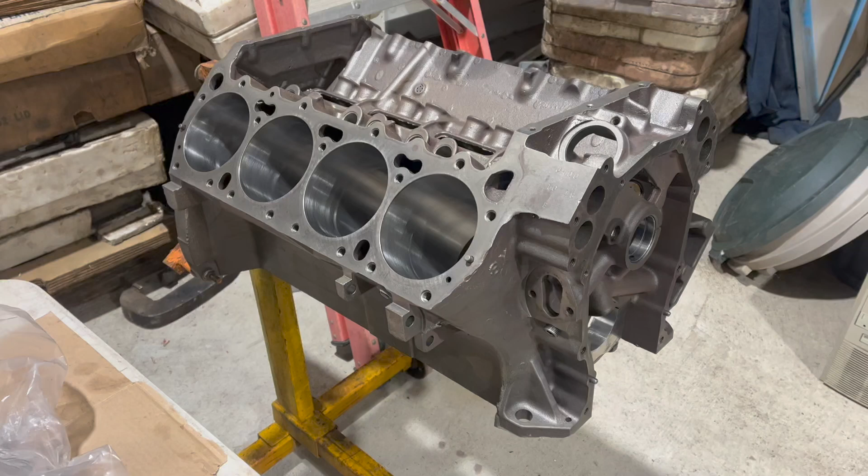Today on the Dodge Garage, second verse, same as the first, except it's not at all the same, actually. More on that in a minute. This is not a full rebuild guide video. If you want one of those, go see the video I did on this 440 a few weeks ago.

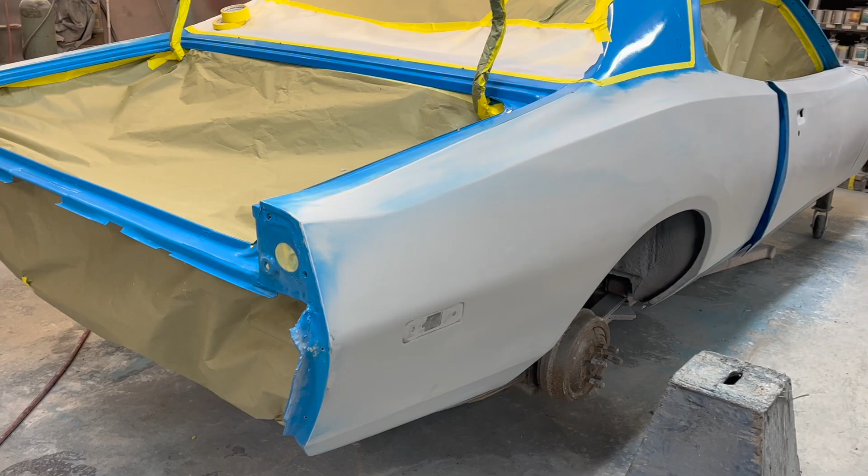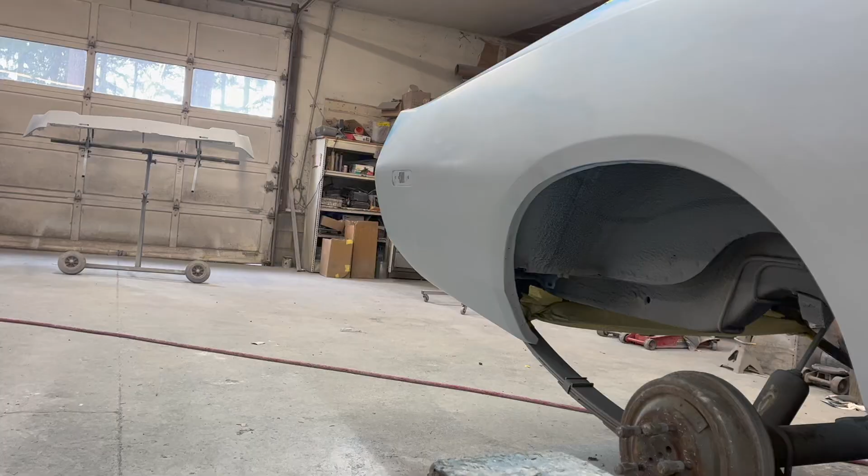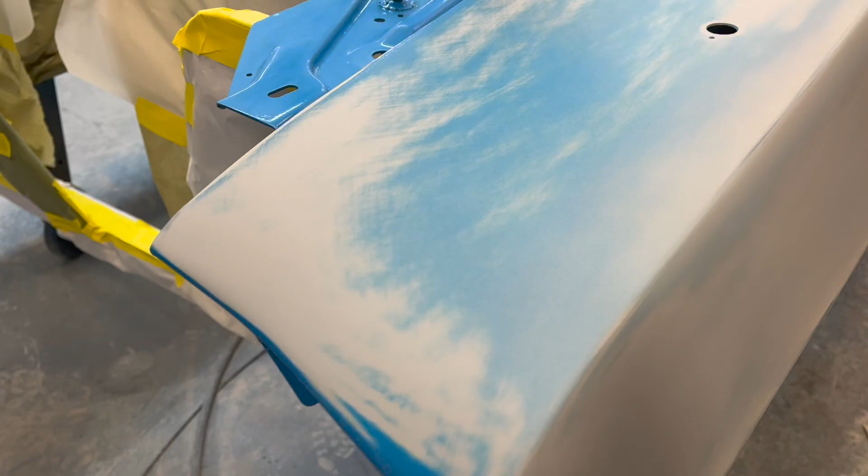This is the factory 400 block from our 73 Charger project. The car's not here right now to show you, but well, we could just pretend it's this one. I did recently go over to the body shop to check on the progress on that car, so let's cut to that real fast. Sure looks good, doesn't it?

The factory 400 block was cleaned and machined by our favorite local machine shop, Johnson Machine. They did go ahead and install the cam bearings for me too, which is great. Although it was a low compression cast crank engine from the factory, the 400 is actually a very popular platform for doing performance builds because it has the biggest bore of any Chrysler big block. It also has the lower deck height though, which means it weighs a little bit less than a 440 and it fits in things better.

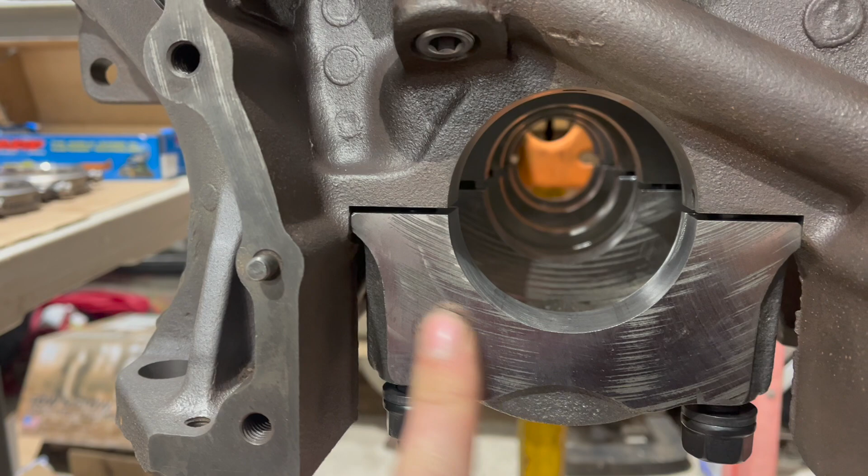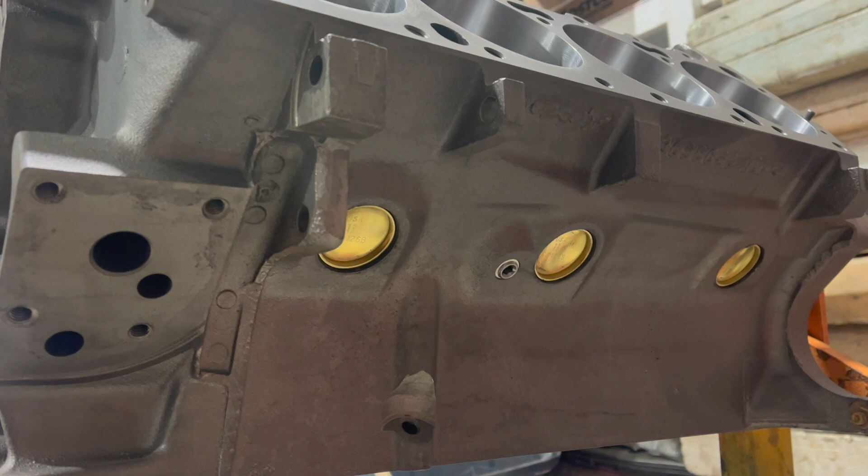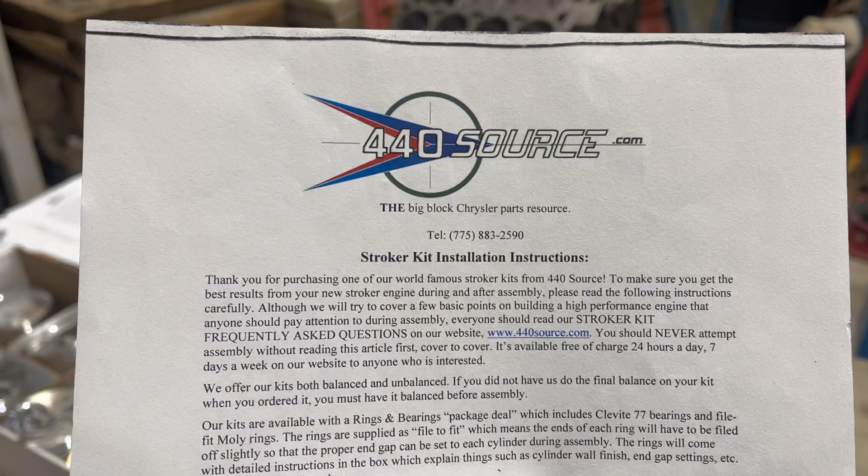Cool stuff. Back in the bad old days, the way to make yourself a really awesome short deck motor was cut down the mains on a 440 crank and shove it in there, along with a piston to make all that work. The end result is a really neat engine. That's basically what we're doing here, but better in every single way. The stroker kit I'm going to be installing in this engine comes from 440 Source, along with the cylinder heads and just about everything else. They've gone to great lengths to make this kit easy to install and easy to understand.

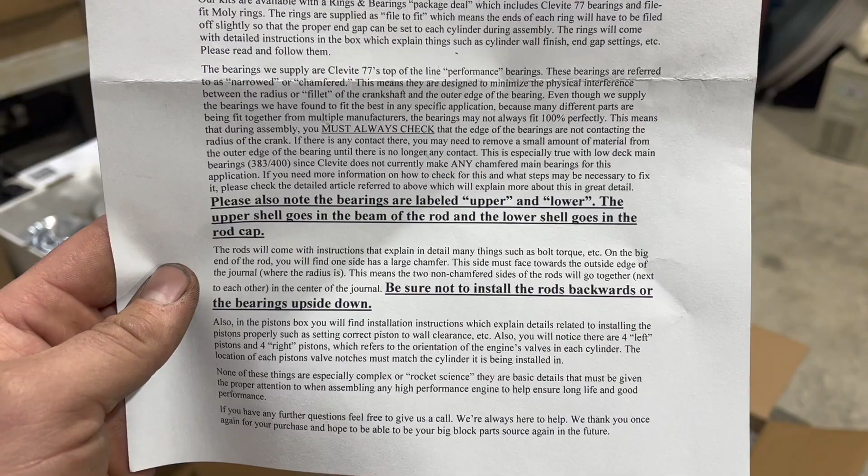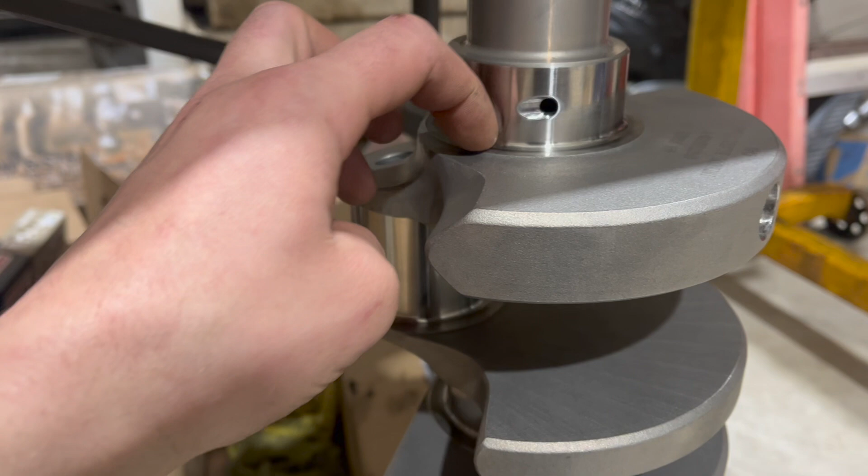This is the crank included with the 440 Source stroker kit. It's a very nice piece. Note, the machining looks excellent. Also note this chamfer here. More on that in a minute. These assemblies come pre-balanced. Johnson did go ahead and verify they did a good job, which they did. We're going to install it as it came.

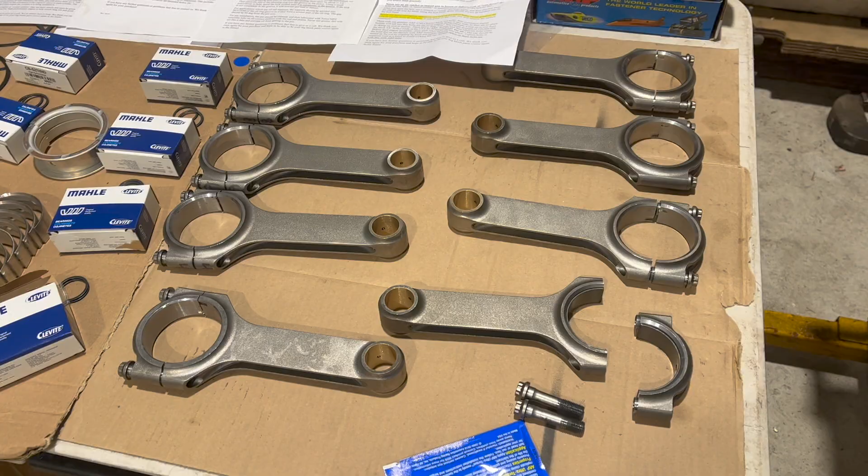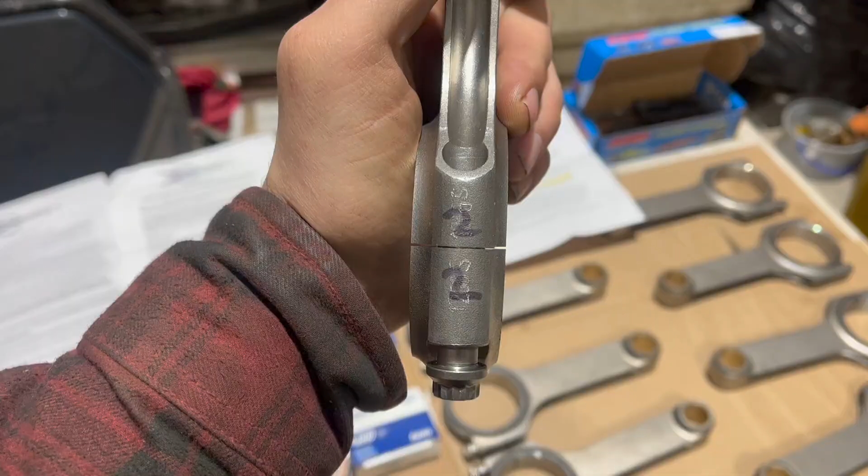Here are the rods included with the kit. They're H-beams. They look very, very nice. They're bushed for floater pistons, and they include ARP fasteners. Again, really good stuff. As I'm laying stuff out here, I have hand numbered the caps and rods just to make sure I don't get them mixed up. In the instructions, it says specifically you are not allowed to use a hammer type punch number marker or anything like that. You're not allowed to grind on them either because of structural rigidity.

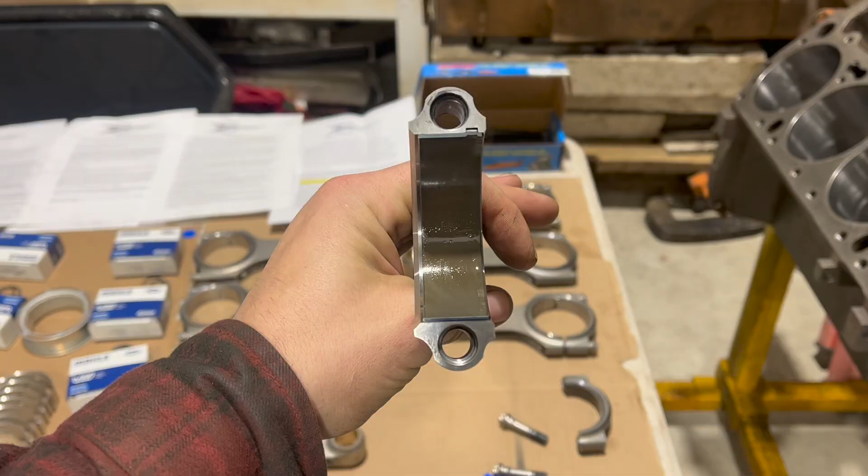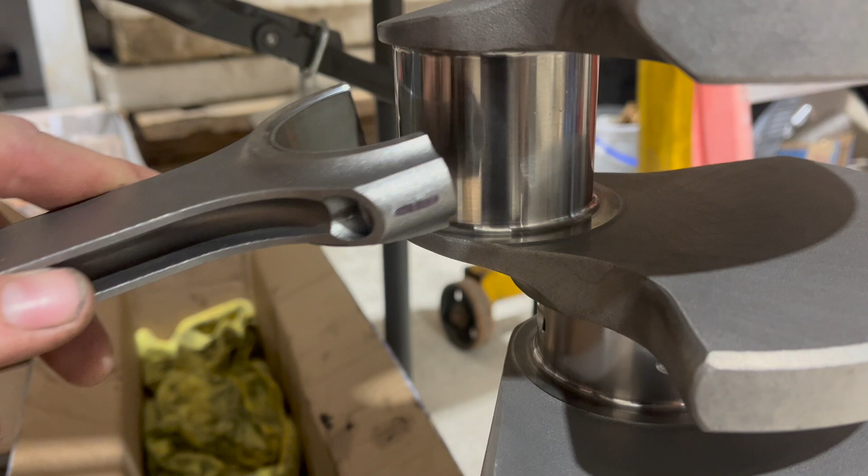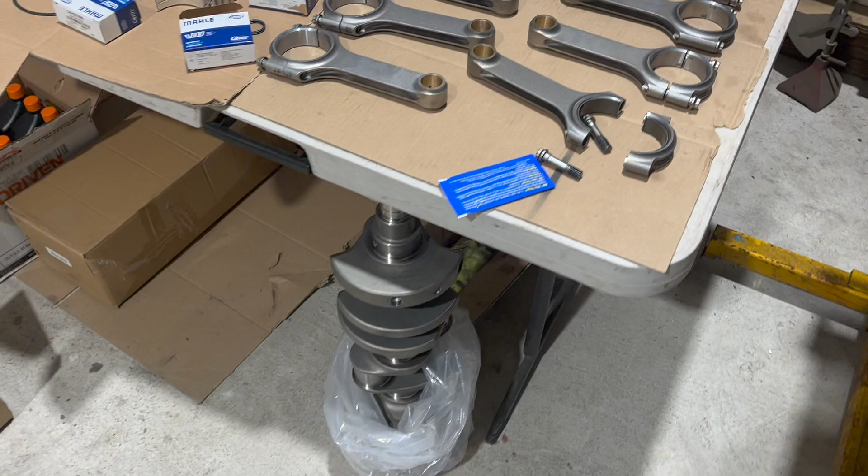These rods are provided with a special high performance set of rod bearings, and here's why. Notice it doesn't fully fill the journal area there? That's because this bearing is specifically made to match cranks that have a chamfer here. A factory type bearing is wider and it would interfere with that. You don't want that. With this one, it sits nicely, just like so. It's great that 440 Source makes this a no-brainer by including the correct rod bearings. If you're putting a combination like this together, or maybe you're rebuilding one of these 10 years from now, you're gonna wanna make sure you get the correct bearings or you're gonna have a bad time.

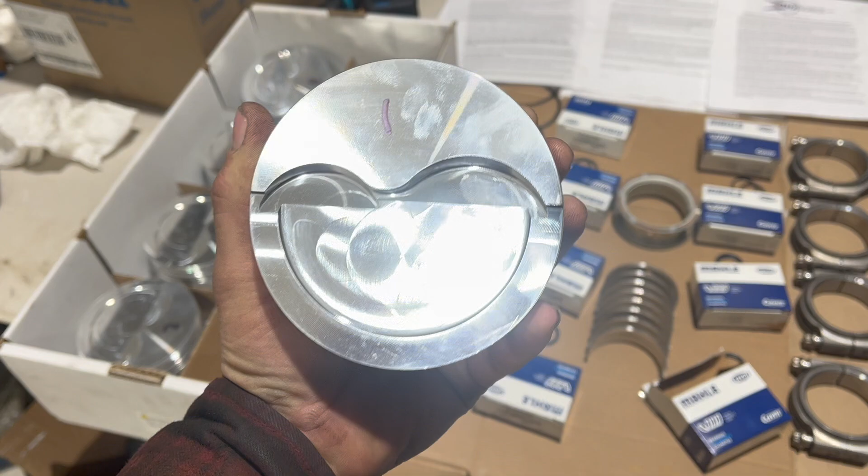And now for the pistons. Look at this. It's so small. It's so light. The pin is raised all the way up into the oil ring area, so yeah, that's interesting. Obviously, this forged piston is made by Icon. You can see here the asymmetrical valve reliefs. It is, of course, a floater piston, so it's going to use these spiral locks to retain the piston pin thingy.

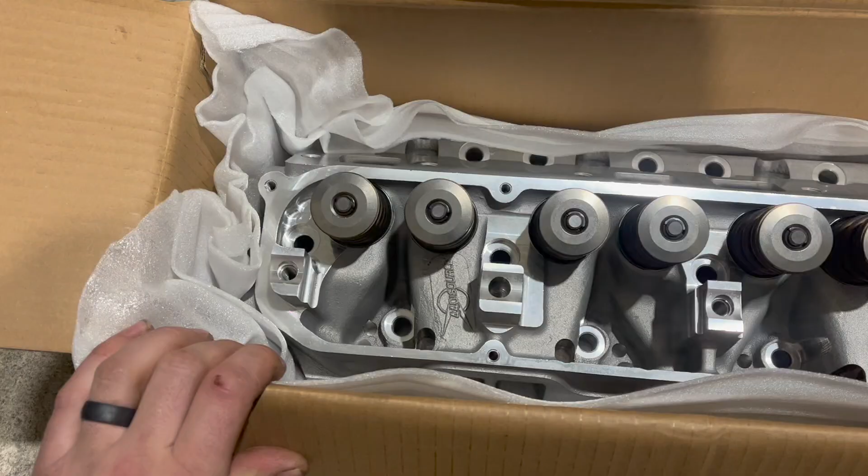Because the valve reliefs are asymmetrical, you have to arrange them in left and right. This sets those reliefs up to match the pattern of valves on the head, which is exhaust intake, intake exhaust, exhaust intake, intake exhaust. You don't have to just remember that either. You can just look at the head.

Exhaust, exhaust, two intakes in the middle. So make it match that. You can see here why it needs larger relief for the intake valves. They're humongous. And since we're already here, we better just take a look at these 440 Source Stealth heads.

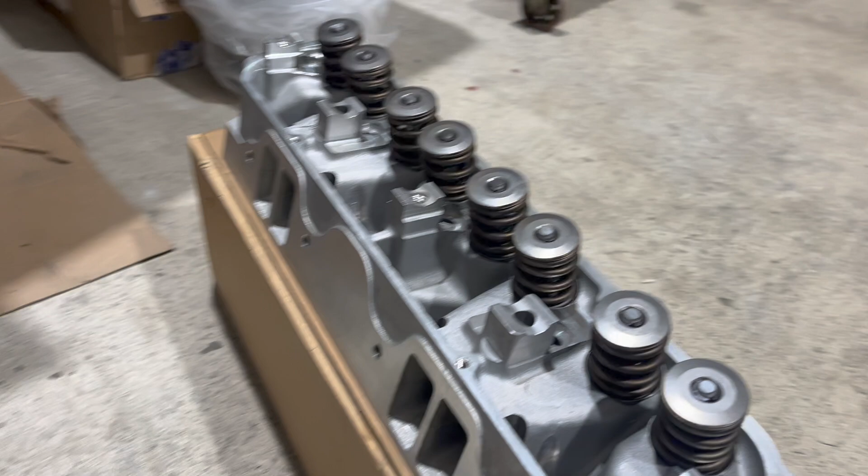If you don't know about these things, they're amazing. They're made of aluminum, and they're a performance unit, but they're made specifically to look just like a factory iron head. So once you throw some paint on these, no one's ever gonna know that they're there. Okay, they'll know if they look at some of the finer details here, but that's not the point.

They have coil inserts in all the bolt holes for strength. That's awesome. Standard rocker shaft oiling. Looks great. They come fully assembled with valves, valve springs, keepers, all that stuff. I don't actually know the specs on these springs, but for what we're doing, I'm just gonna assume they're fine.

And now for the truly amazing part. We paid $600 each for these heads. Seriously, how are they that cheap? We did have our machinist check these as well, and they're good to go. You definitely want to do that with any set of assembled heads you're ordering. I've heard Edelbrocks are particularly bad, but yeah, these things look really good.

I don't think you can usually get an old set of iron heads reconditioned for $1,200 with all new valves, springs, hardware, machining, the lot. These are really neat, really smart money. And did I mention, they're like impossibly light. I don't even, yeah. Super neat.

That's so cool. I set this on here to check the dowels. I think I mentioned this in a previous video. I've had issues with heads hanging up on those dowels before, and well, leaky head gaskets are definitely something we don't want on this deal. Looks like it's all good.

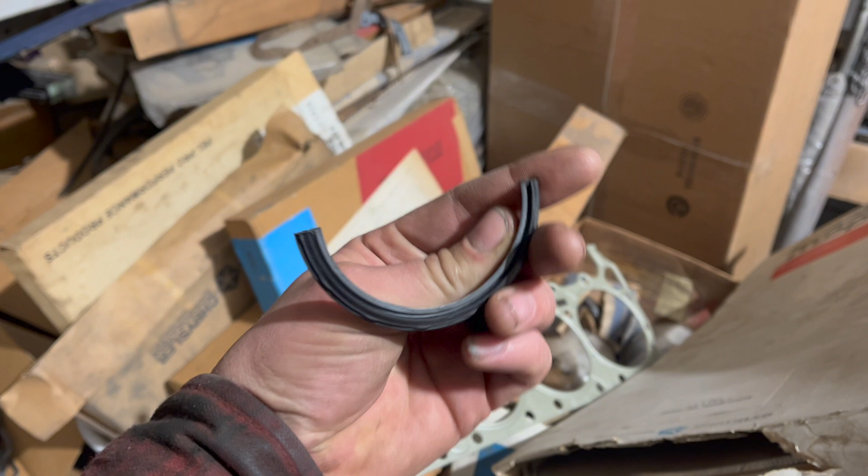Well, I have the main mechanical pieces. I'm missing some small stuff. Camshaft, rockers, lifters, pushrods. More on that stuff in a minute. One important thing, gasket set. I really need a rear main seal right now to install the crank, and I did find one back here. I also found something neat. Factory Mopar branded replacement steel shim gaskets.

On the subject of things that are missing, I guess now's a good time to talk about the cam. I imagine this is the thing people are going to ask about the most, so let's cover that. We're doing a roller conversion on this engine. Honestly, we're doing it for longevity, and so we don't have problems, but also because, well, it's in the budget, and it's way better than flat tappet.

Let's talk about what this engine and car are going to be, and what they're not going to be. What they are is a very great daily driver with torque, fuel injection. The car is probably going to be running with stock exhaust manifolds, but the owner wanted some more poop than you could get with a factory 400. But he wanted to do that within the confines of the factory block. So that's kind of what we're going for here.

This thing is going to fry tires all day long. It's going to do neat stuff. It's not going to make 500 horsepower. There are much, much more radical camshafts available. And the heads that we're using definitely would have allowed for something like that. But that's not the goal here. We're going to keep it reasonable.

With all that in mind, we chose the Lunati Roller Conversion Retrofit Hydraulic Roller Cam, designed for a Chrysler big block, and it's a split duration 262/270. The duration at 50 thousandths is a much more reasonable 211/219. Our lift is 507 intake, 515 exhaust. Again, not a ton. Something in the neighborhood of the legendary 509 Mopar cam.

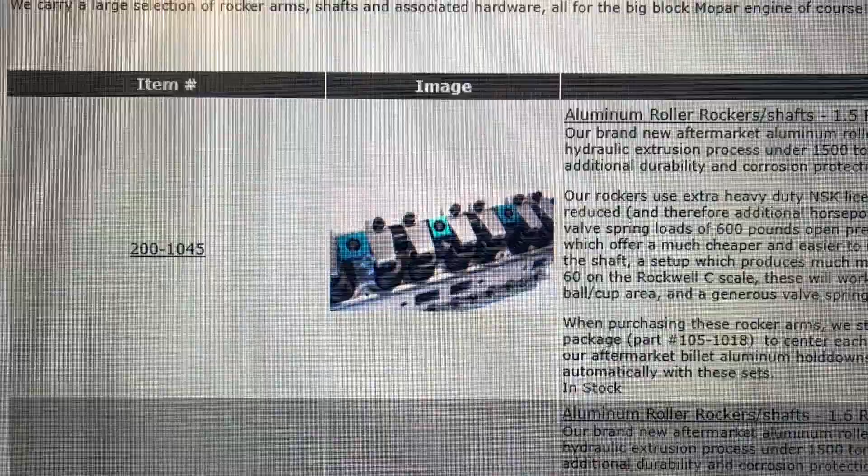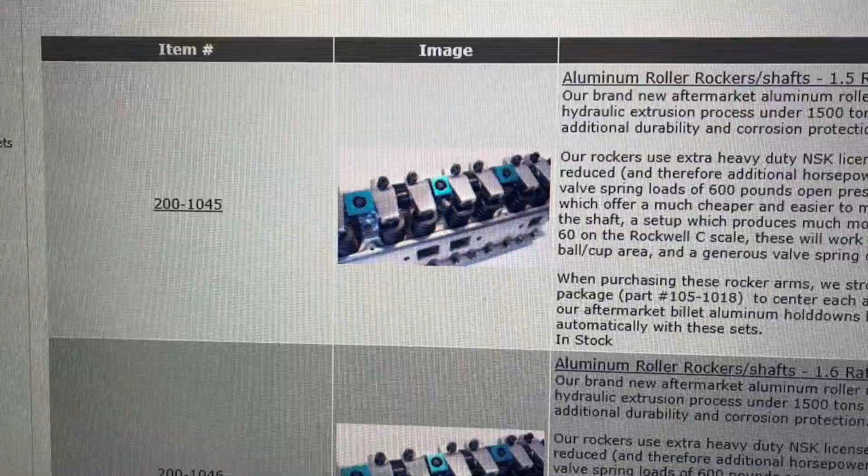We're not installing these to get the most horsepower possible. We're not installing these to spin this thing to 7,000 RPM. We actually are installing these to get the adjustability, so we can lash the hydraulic rollers correctly to try and prevent valve float and get really nice RPM ability within the confines of our modest street cam, that is. We're also using an Edelbrock Performer RPM dual plane aluminum intake manifold. It's not here yet either.

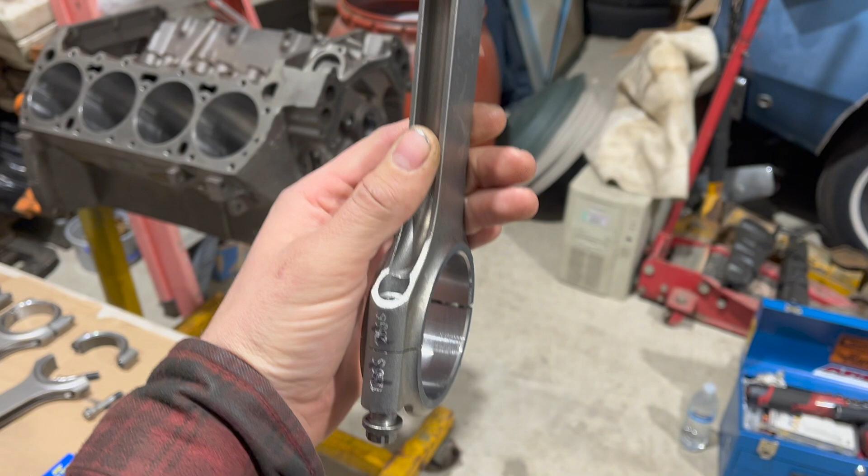Now again, I'm not going to show you all the little minutiae of putting this engine together. I do want to cover some of the specific things to this build, like assembling the pistons in the right orientation. I've mentioned this before, but the notches there for the bearing shells should point to the oil rail. So I've numbered each rod so you'll see the number when it's in its correct orientation. I did number the pistons. Of course, you'll know they're incorrect when you can read that number. Don't put the valve reliefs that way. Don't ask me how I've learned that either.

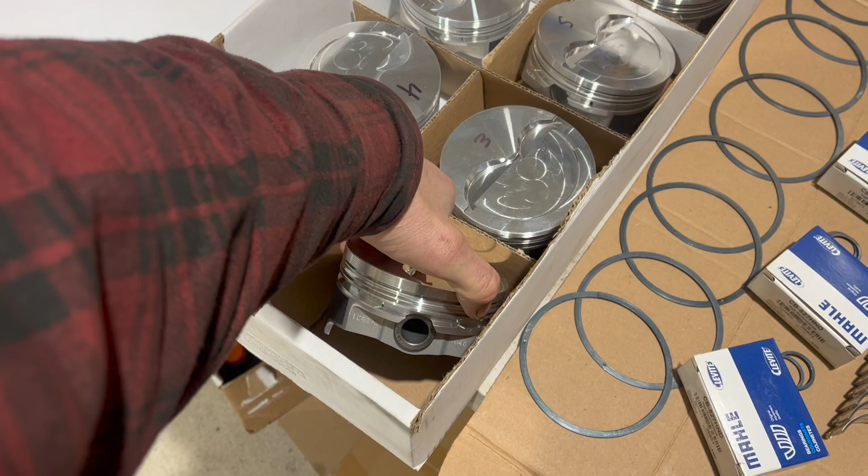One peculiarity of this piston design with the pin raised up into where the oil control ring is at, they supply this extra support ring which goes underneath your oil control ring pack. I've never installed those before either, so it'll be interesting to see what that looks like.

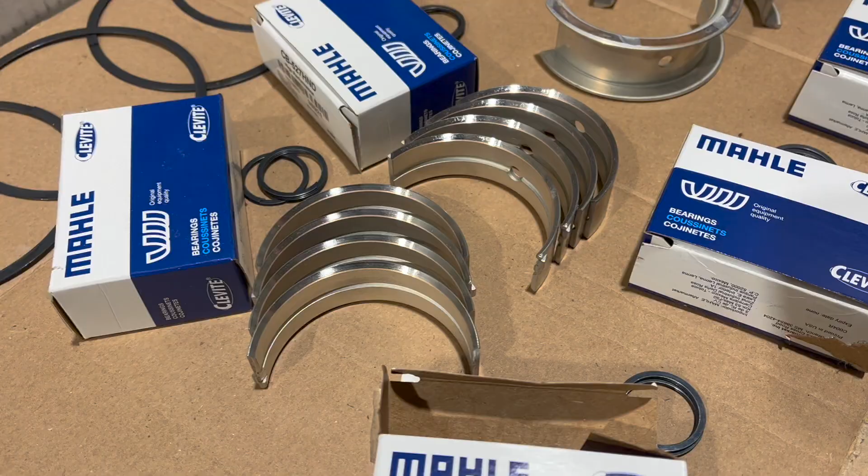Someone asked me on the previous build what I thought of full groove bearings. Well, I think they're the right thing to use for a performance assembly like this, and that's what they've supplied here. One interesting note here, the lower rod bearing shells have oil holes in them. They don't go anywhere, and no, I didn't put them backwards. I thought they might have a passage going up to the pins, but they do not.

Well, you have to start somewhere, and I've decided to start with piston assembly. Let's put these on the rods. Look at that. This is where your pin oil comes from. Scraped off by the oil ring and shoved in there. That's pretty neat. Anyway, the first step here is to install the spiral lock on one side 8 times. I don't like spiral locks. I prefer the snap rings.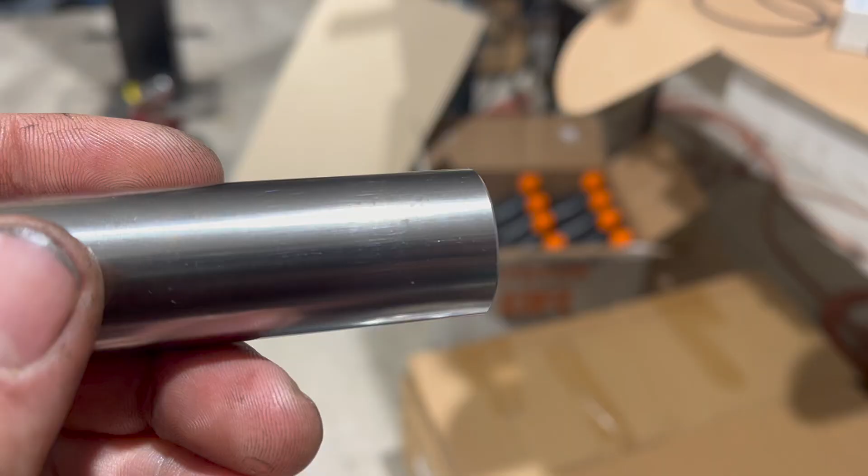Number 1 piston assembly. Did have to rewrite my number because, well, I wiped it off while I was trying to get the dang spiral lock in. Speaking of which, I still have to do another one. Also, obviously the pin got some oil. Now remember, check everything. This pin has light surface rust spots on it. If it can catch your fingernail, it's bad.

If you didn't know, this design is called a floating piston, and the reason for that is that pin in there floats between the rod end and the piston. It's good, less resistance. It's free to move wherever it wants. Obviously you have to have the locks on the end to keep it in place, or it would just slide out, which would be bad. First spiral lock, 3 minutes. 8th spiral lock, 15 seconds. We're getting there.

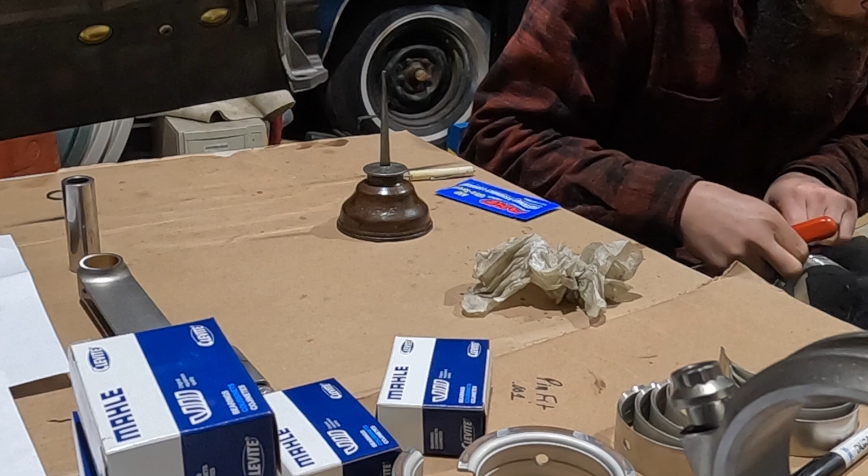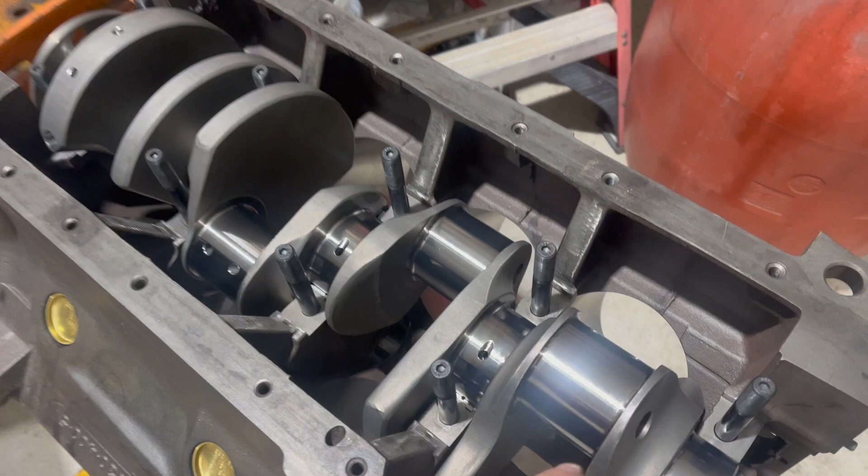Cleaning of the block and the crank, went ahead and dropped the crank in. Of course, the upper shells are in there, as well as the upper part of the rear main seal. Very pretty. Notice on this one, we're using ARP main studs. If you're going to do that, make sure you follow their torque specs and use their ARP lubricant.

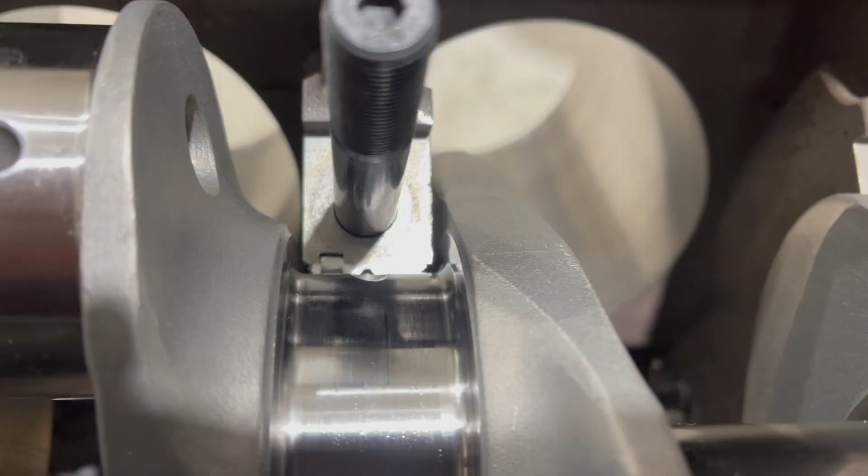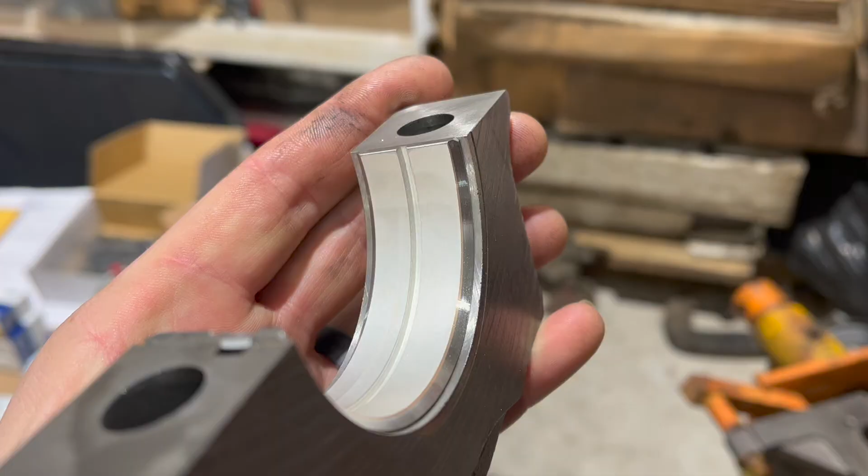One note on these main bearings, they are also tapered on the sides to make sure that that radius has room to live. You can see there, if they were straight, it would be very, very close. Here's a look at the lower shell and the cap, and you can see it quite clearly. Machining mark there. Very interesting.

Unlike the factory build, this one has nice, acceptable crankshaft end play. In fact, it might be bordering on excessive, but you know what they say, a loose engine is a happy engine. Mains torqued to the ARP spec, which is 110, not the factory number. Also note, it spins great. Always take time to check that as you're putting your engine together.

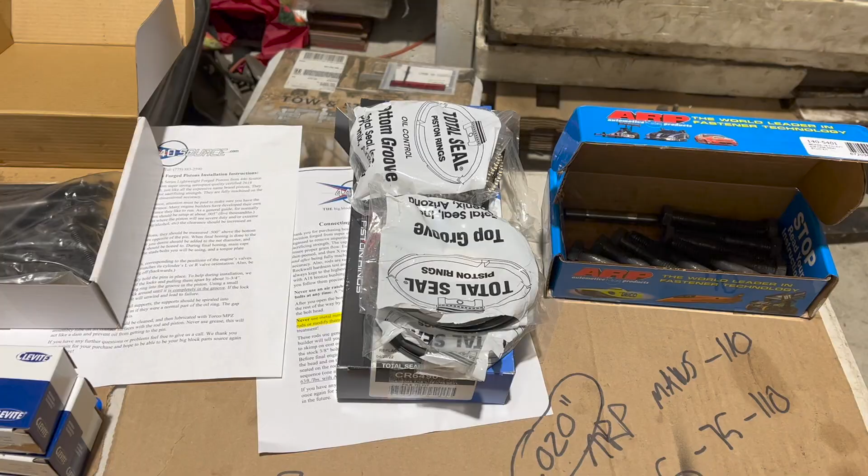Now with the crank done, unfortunately now it's time to turn my attention to filing rings. My favorite. On a factory build, chances are kind of good you'll end up with a set of rings you can just install. Of course, you always want to double check the gap and make sure it's safe, but that's how it went on my last 440 build.

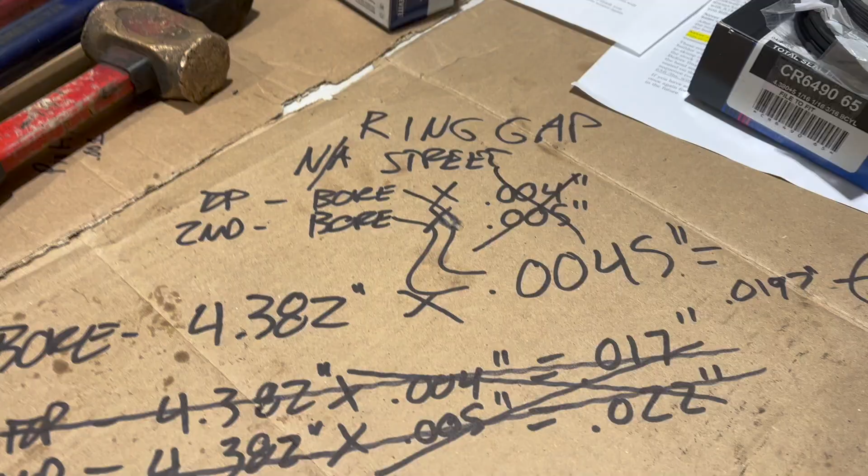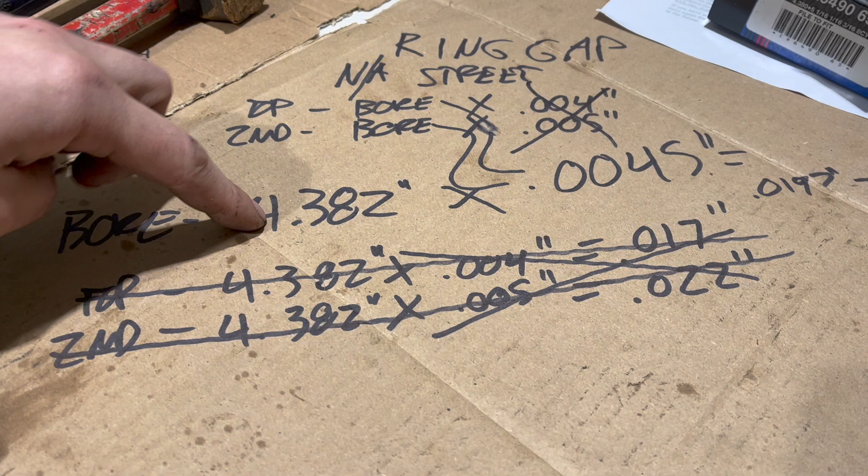On this thing, well, this is a performance engine, and we need to verify that the end gap ends up within a certain tolerance range, so it's safe. To begin with, I consulted my favorite chart on the subject. It indicates that for a naturally aspirated street engine, what you want to see is 4/1000ths of an inch gap per inch of bore for the top, and 5/1000ths for the second.

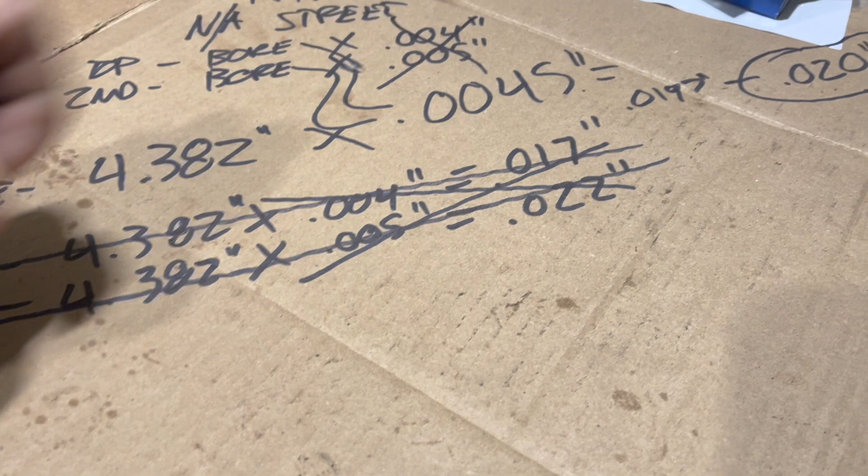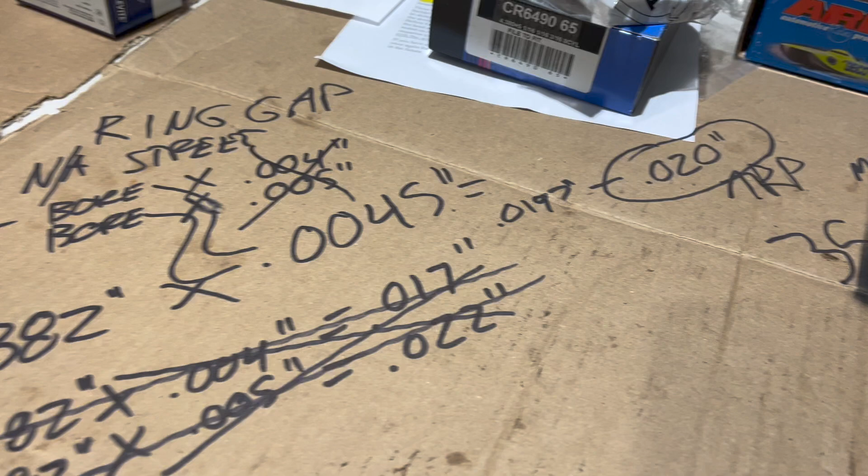I did the math on those numbers and came up with 17 thou on the top ring and 22 on the second ring. Then I went ahead and looked at the Total Seal instructions, and they indicated that for a street engine, they want to see 4.5 for both. So that gives us just about 20 thou. The moment you add boost or go drag racing, these numbers become completely wrong. So consult the chart that's included with your rings and find the right numbers for what you're trying to do.

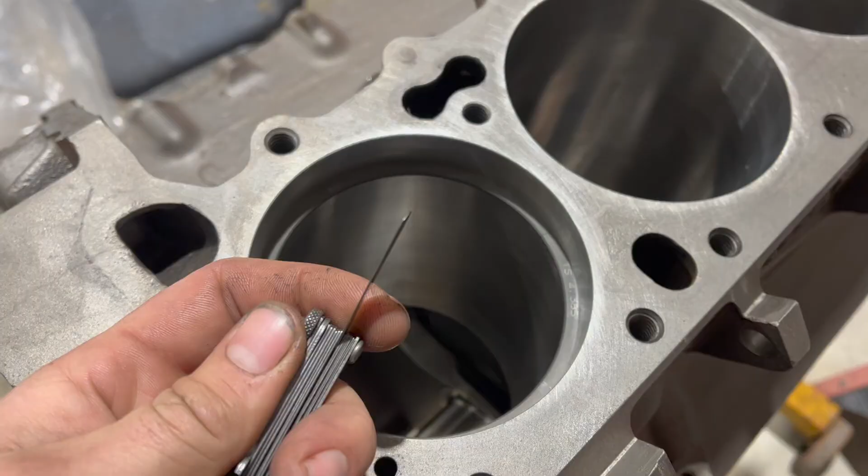A 20 thou feeler gauge looks like this. Currently, the end gap in this first ring I've selected looks like that. Clearly there's going to be a problem. We need this feeler to sit comfortably in that gap all the way to the outside. And ideally, straight, not wobbly. So we need to work on that.

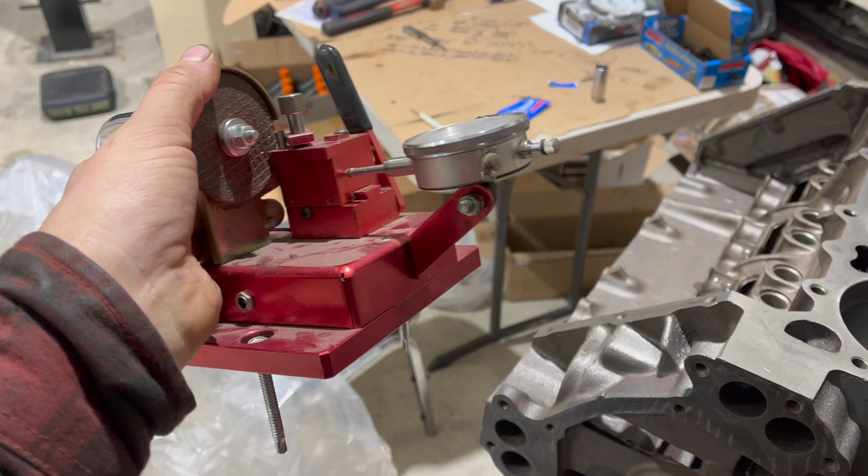Now there are a lot of ways to get this job done. You could use a hand file. You could use a hand crank ring grinder. I'm going to solve that problem a different way with this, my Proform electric dead battery powered ring grinder. It also has a mic on it, which is almost completely worthless.

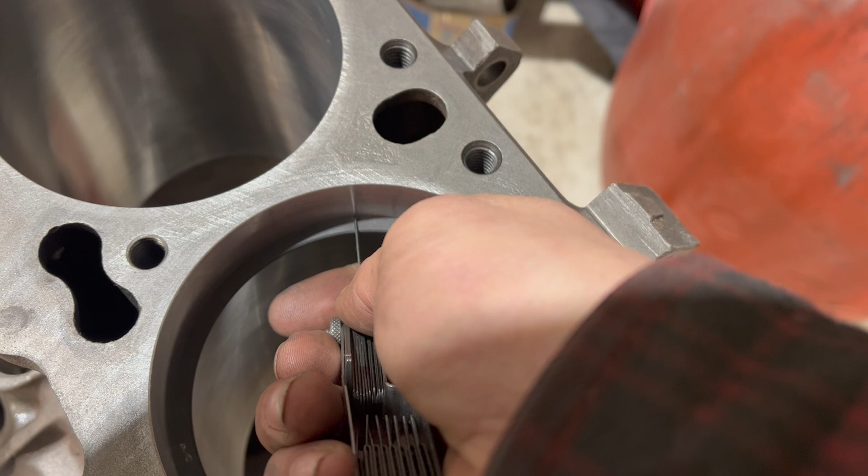Okay, got just a little excited on my test pass, and well, we're probably more like 22, but hey, it's gonna work. Obviously the goal here is to end up with the ends parallel, and you do have to clean them up with a file to remove any burrs or little bits hanging off of there.

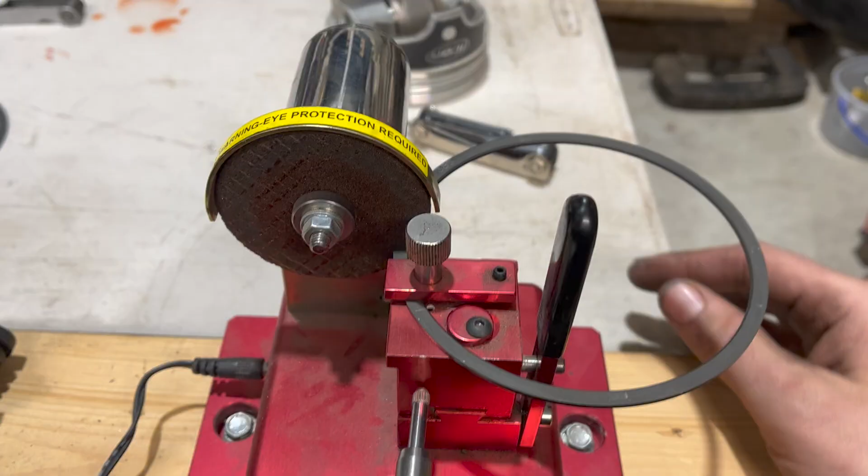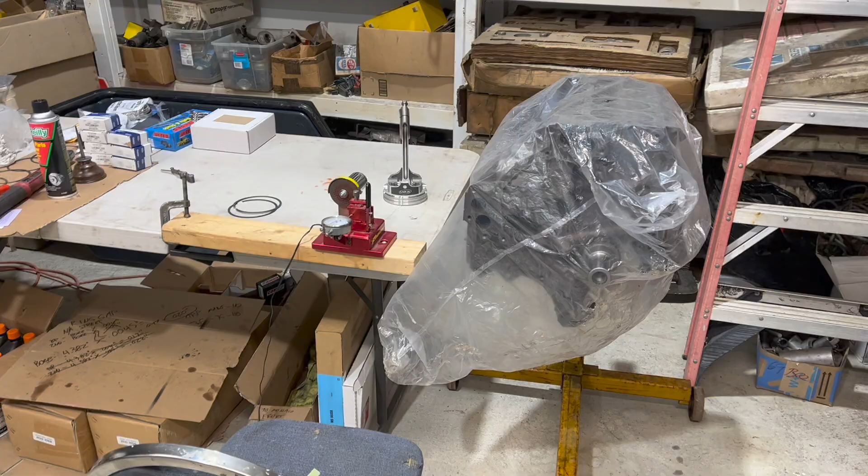Now that I've got everything set up and adjusted, this is what the next forever of my life looks like. Look at that, it'll grind it by itself. That's nice. Okay, it's not gonna be 100 years. I got both of them done for cylinder 1 in about 5 minutes. Either way, as you can probably tell, there's a whole lot more to do here. A lot more science to figure out.

It has occurred to me that someone right about now is starting to type out a comment asking what this build costs. So, 440 Source, we've given them, well, approaching $6,000 for all of this stuff. It's more like $5,500. I don't know the exact numbers. The point is, the stroker kit's not cheap. The heads are pretty reasonable, but there's a lot of money here in rotating stuff. I'm not saying it's not worth it either.

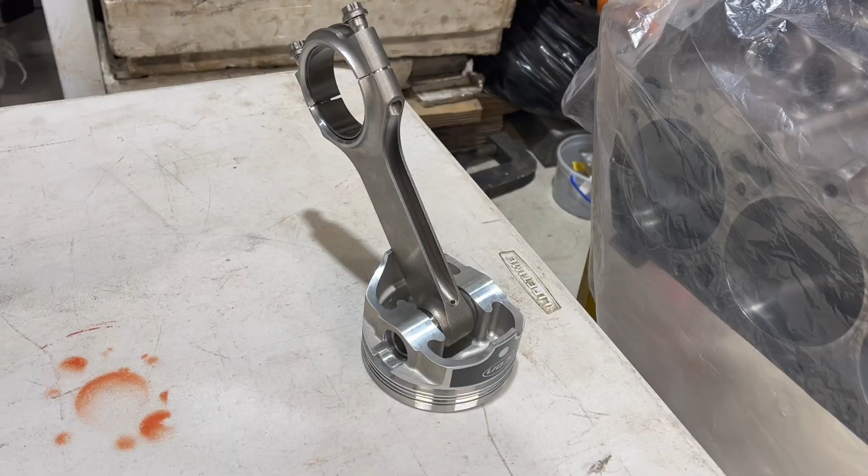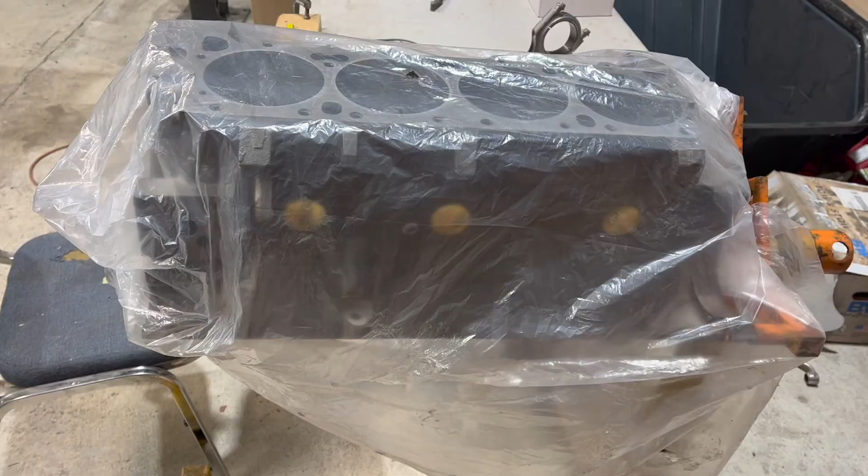It's amazing. I didn't actually hear the total machine work bill on this block. I know it had to be line bored, and obviously the cylinders were bored, and it was cleaned. I'm gonna guess the machine shop bill was approaching another $1,000. It would have been much more if they'd had to recondition heads, obviously. We ordered the roller conversion camshaft from Jegs, I believe, and it was approaching $500. As you can probably tell, this isn't exactly a budget-conscious build.

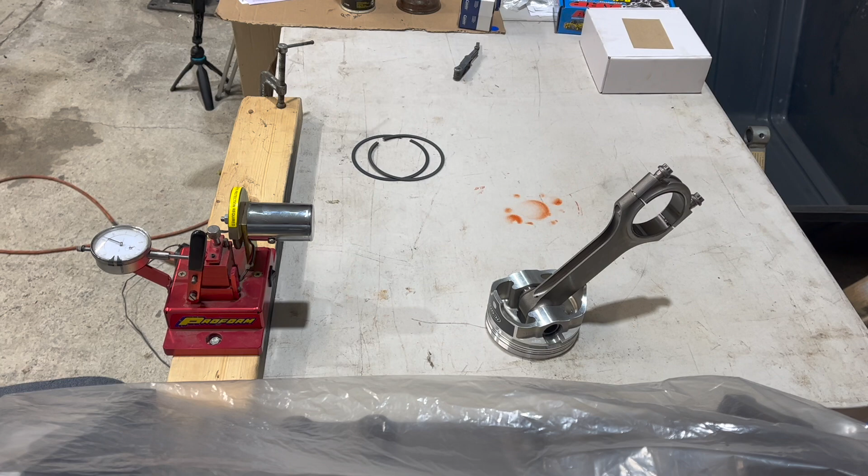And that's why I never do builds like this. Most of the engines I put together, well, yeah, the engine that's free, that's the one for me. But this is pretty awesome. And I must say, I'll be tempted to build one of my own if this performs the way I think it will.

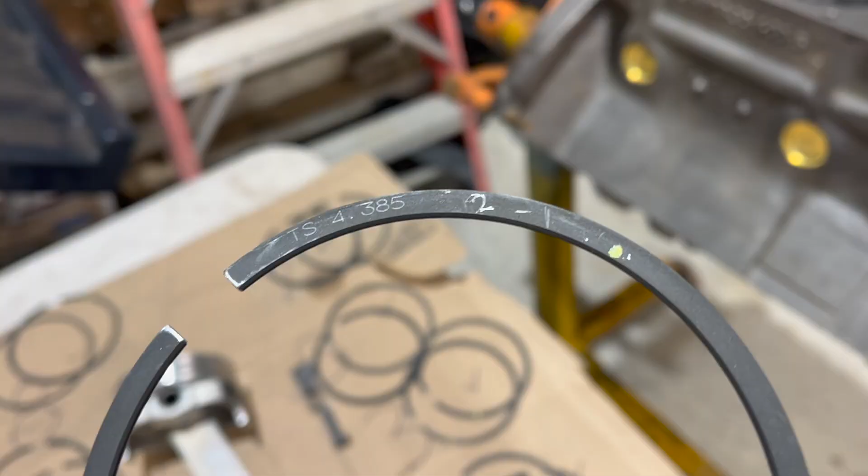Hey, look at that. It's a full complement of finished filed rings. Every one of these got roughed in on this machine, cleaned up with a hand file so they wouldn't score the bores, put in the bores, checked with a feeler, then taken back out, adjusted as necessary, and then cleaned up on all 4 sides of each edge. So as you can imagine, that took some hours. Something like 4, I think. Each one of them's been checked in a piston to make sure it slides right in with no problems. Note, these are all checked and marked per position, per cylinder.

The gap I was shooting for was about 20 thou. Admittedly, a lot of them ended up closer to 22. And that's not a big deal. You might give up the tiniest little bit of sealing, but smaller than 20, that would be a problem. Remember to clean everything. This is the gunk I got off of the 2 rings for cylinder 1 alone. The yellow marker was sort of a progress reminder I was using. It can go now. Now remember, the learning curve can be quite steep, so just try not to fall off. I mentioned these oil control ring support rails before.

The first one I put in, I just dropped it in there, and I tried to install the expander next, and it wouldn't fit because that rail was all wavy. That's because they have this little dot that has to go in this gap.

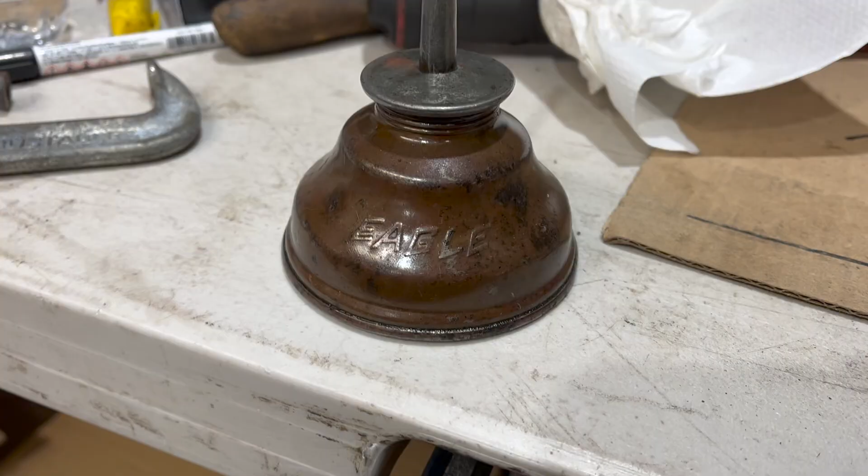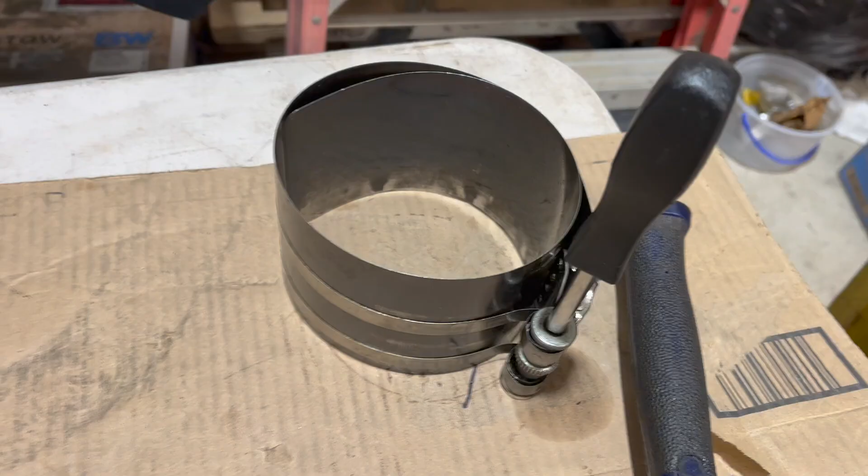And speaking of learning, I've learned something since my last 440 build video that I thought I'd pass on to you. That's right, not only do I not know everything, I'm going to tell you when I'm wrong and when I've gained an enhanced understanding of things. I've been using WD-40 to lubricate piston rings and cylinder walls and the ring compressor for years. That's the way I learned to do it. It's never been a problem.

It works great. However, friend of the channel, constant commenter, and member of our Sunday live streams, Rooster, also known as Spanboats, that's his handle, schooled me on WD-40. It turns out that it has some amount of alcohol or something in it, and as it evaporates, it actually attracts moisture to nice, shiny, finished surfaces. He had anecdotal evidence proving that this happens.

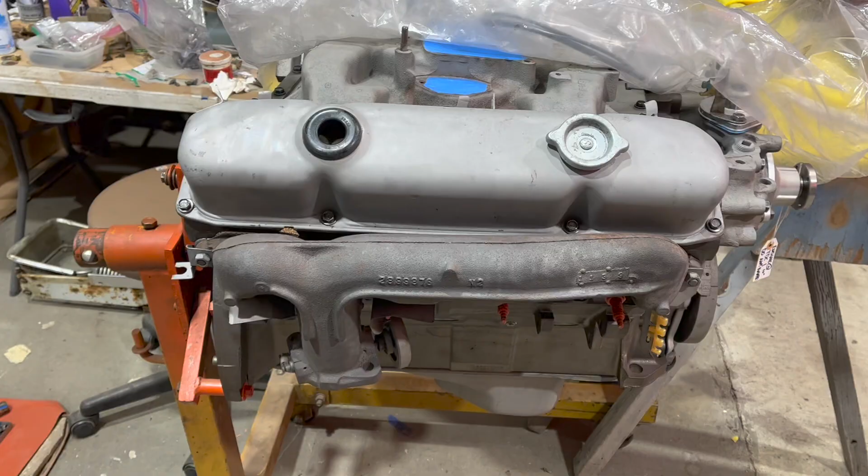I went out to my storage building where I put things after my shop closed, and, well, my Magnum block that I doused in WD-40 to try and protect, all the machine surfaces are surface rusty and horrible. Now, that doesn't mean every engine ever put together with WD-40 is ruined, which is good because I got one sitting right here. What it does mean is if you're going to build an engine and then it's going to sit around for a long time and there's any chance of moisture getting into it, I mean, even if it's in your garage and there's some heat, if it's damp in there, bad things can happen.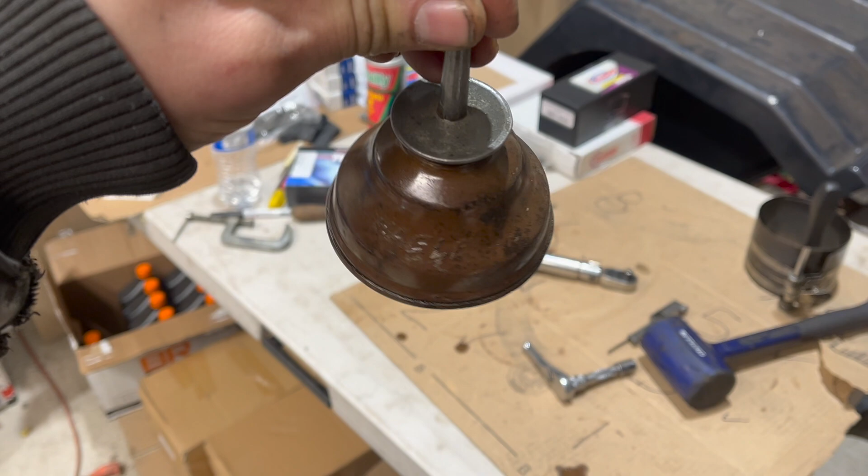So let this be a warning. I've learned, and you can learn too. Moving forward, I'm just going to use our old friend engine oil, which I use for everything else in this assembly. On the rings, the cylinder walls, the pistons, the thingy. What I'm not going to do, and what I suggest you don't do, is just absolutely douse all of this in oil. A light coating should be sufficient.

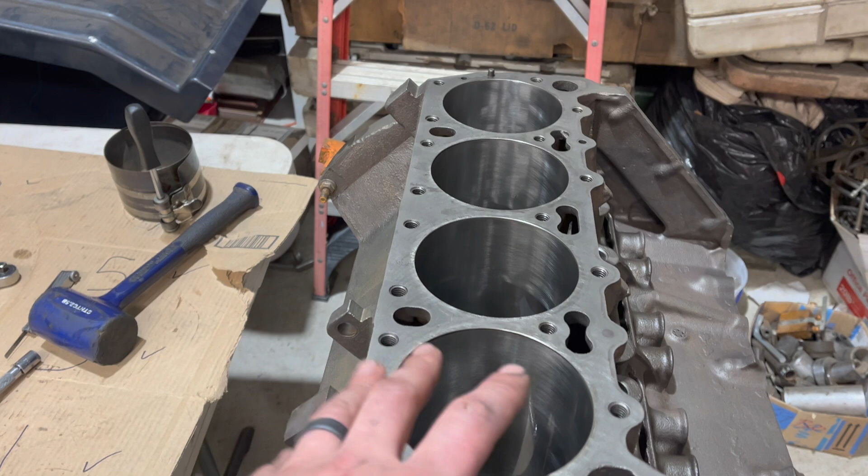The reason I've always used WD-40 is it was my understanding that it's possible to glaze your cylinder walls with excessive oil. WD-40 gives lubrication for assembly and rolling the engine over, but it doesn't create a crazy film on there. It's just a light little lubricant, you know? That way, the ring and the cylinder wall can cut into each other and mate, which is what you want, at least if you want your engine to have compression.

I've also seen professional engine builders do what I just said not to do and coffee can pistons and drop them in the engine just absolutely doused, so maybe they know something I don't. The long and the short of it is, there are many, many ways to skin this cat, so this is how I'm going to do it, and we'll see how it goes on this one. Look at that. Rotating assembly together.

And look at that, the car's back! Because it's been, you know, some days since I started this. I couldn't say this before I got them all in, or I would have cursed myself, but that was the easiest set of pistons I've ever installed. Part of it, it's got no studs sticking out of the rods, it's got bolts instead, so there's less danger down there. Didn't have to do the hose loop trick, so that's kind of nice. I'm sure a huge part of it is the better lubrication from engine oil.

In addition to the car magically appearing, a bunch more parts did. I actually have a full gasket set, an intake manifold, fancy rocker arms, but no cam yet, so I'm still going to have to stop the build here for a while. And rods are torqued. These rod bolts are nothing like stock, so the torque spec, similarly, nothing like stock. ARP and 440 Source specifies 63 foot-pounds for these.